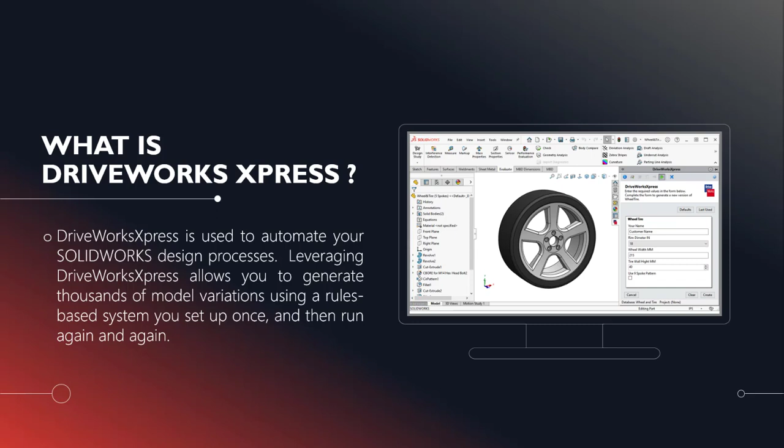And today we're going to be looking at DriveWorksXpress. DriveWorksXpress is basically a SOLIDWORKS add-in, or a tool rather, that allows you to automate your design processes. So in the case where you have like a base model where you often have to do slight changes to it, or one-off changes where maybe a dimension's changed or a new feature is added here and there, but it's not a big change from the base model, it is a great tool to automatically drive those changes rather than going off and doing it yourself or having a designer spend time doing those changes.

So some of the benefits of DriveWorksXpress are it helps you minimize errors by using rule-based inputs. Basically, they're just form inputs that capture geometry from a model and push out model variants. So it also helps you save time by creating the models in a fraction of the time it would take a designer to go in and do it by hand.

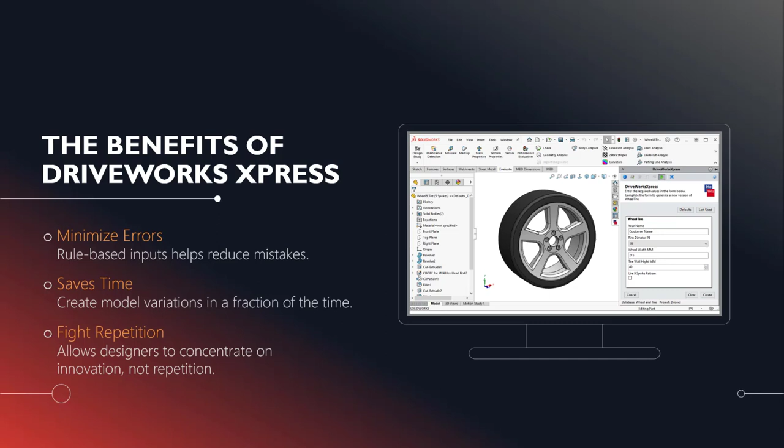And again, it saves the designer from being a little bored and having to do repetitive tasks that may not really require much thought and innovation. So it frees them up to innovate and come up with some new, more important stuff. It lowers your costs, again, by spending less time on one-off design, and it enhances your production.

And if you're familiar with configurations, you know that you can already do this type of stuff through them by just going in and picking a configuration for a base model that suits your need. But for some things, you might end up having thousands of configurations, hundreds of configurations, and it's a little tough to go in there and find what you're looking for, and it makes the model or assembly pretty heavy.

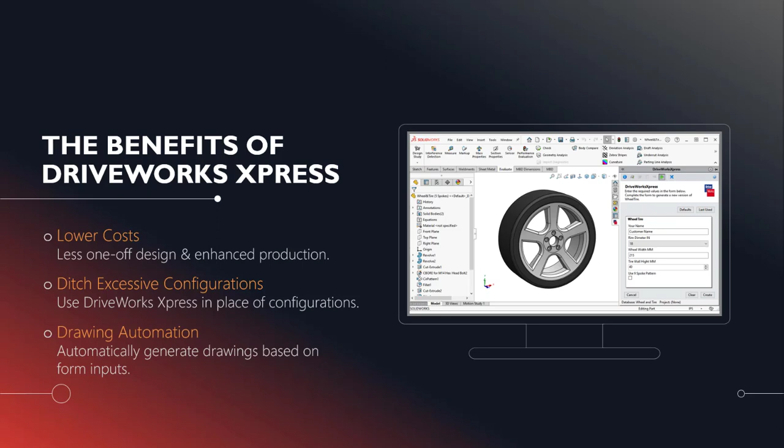And then again, you can also pump out a drawing along with these model variations. So without really any designer input for SOLIDWORKS, you can create a new model variation and an associated drawing. So it's a pretty powerful tool. In today's session, we're going to focus on a wheel and tire project. I chose this because there are tons of possible variations with the combination of rim sizes and wheel widths and tire heights. So having configurations to represent all the possible combinations of these would be a pretty big part. So this is a good tool for that.

It's simpler than using design tables. If you are familiar with automating your designs in SOLIDWORKS, you could do similar things with design tables, but the form inputs used in DriveWorksXpress are much more intuitive, and it allows someone who's not familiar with SOLIDWORKS at all, or even the design tables for Excel-based tables, to go in and just basically create the design they're looking for. Could be a shop tech or even the customer. And again, it'll create an associated drawing there with the variant.

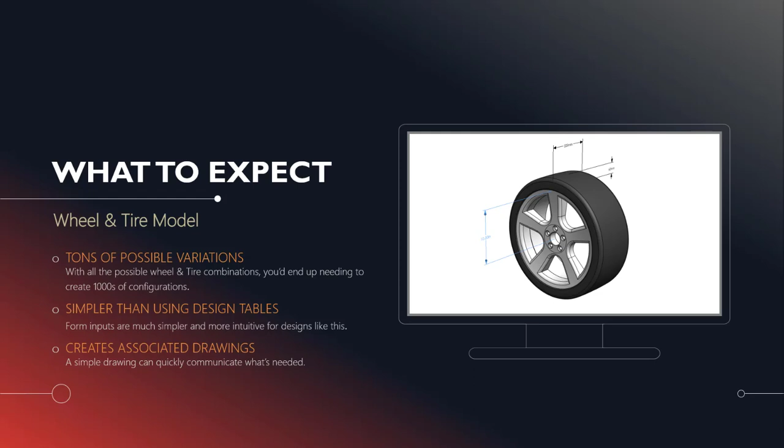The things we're going to go over today. First, we're going to capture the model and the model data. These are the dimensions and features in the model that are actually driven by the values that you input in the form. Next, we'll go ahead and create the input form. This is basically where you define the values that are input by the customer or the tech or what have it. And then we're going to define the rules.

The rules are used to basically link the input form with the model data and actually push the changes. So these are equation-based rules, basic logic. If you're not that familiar with logic, don't feel too bad there. It's pretty easy stuff, and the rule builder helps you out. It's not hard at all. And then we'll go ahead and produce a model variation and a drawing based on that variation.

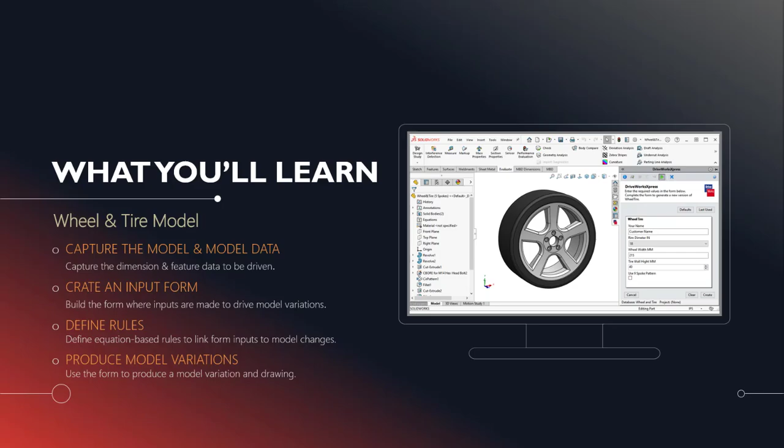So to start, if you have never used an Express tool in SOLIDWORKS, they require activation. Now, DriveWorksXpress does come free with every seat of SOLIDWORKS, but you still need to go to mysolidworks.com/express. And if you don't already have a profile for mysolidworks.com, you can set it up and enter your product key there. And once you get to that point, they'll give you an activation code. And then when you go to actually launch DriveWorksXpress, it'll just prompt you to enter that code. And you just have to do that once. So every time you go back in the future, you don't have to worry about entering that code each time. So let's go ahead and get started.

And I'm just going to go ahead and pull up SOLIDWORKS here. And you can see my wheel and tire model here. Pretty straightforward. You can use Xpress with assemblies or parts. There's no difference between the two. Parts are just a little bit more simple, so for the purpose of this demonstration, I just chose to go with the part. I also have it set up for capture annotation. These are the dimensions I'm going to capture here shortly, and they're actually going to drive the model changes.

So I'll double click on that to show you these. You might also notice that I'm dealing with inches here for the rim size and millimeters for the tire size. This is not only kind of a standard in the industry, but it'll allow me to build some more complicated rules when we get to that point, just to show you all the things that DriveWorksXpress can do. Besides that, it's a pretty straightforward model.

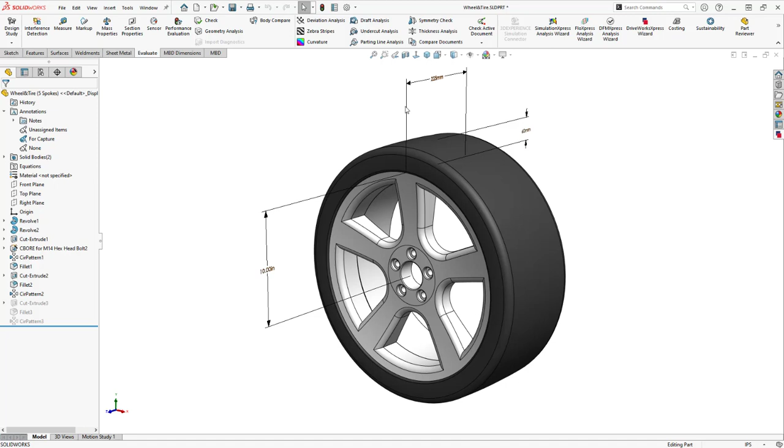So let's go ahead and get into DriveWorksXpress. DriveWorksXpress can be activated from the Evaluate toolbar here, or you can go into Tools, Express Products, DriveWorksXpress. It'll open in the task pane. We're going to go ahead and pin that here just to make sure it doesn't close on us. And you see the three options here: create a new database, add models to an existing database, or run models from an existing database.

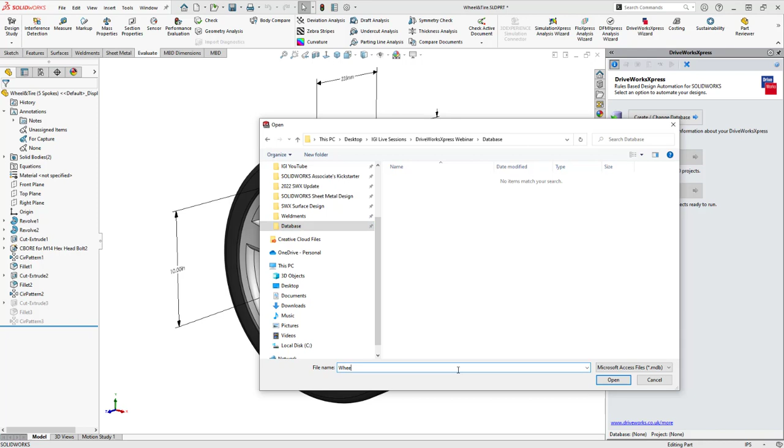Now, since we don't have a database created already, I only have this one option available to me. So with it toggled, I'll go ahead and hit Next. It's just going to prompt me for a place to save the database. I'm going to go in here in this database folder, and we'll call it Wheel and Tire. Now you can see it here populated in the active database.

Next, we need to add models. You can either browse for a new model or use the current model. We'll just hit Next to use the current model. And we can see the part listed here, Wheel and Tire. Now it's time to capture the actual data that will be driven by the form inputs. So we've already captured the model down here. You can see the buttons related to the captured data.

Next, we need to do dimensions and features. So I'll click that button, and you just simply click on a dimension or feature in the graphics area to add it to the list over here. And I've already named my dimensions relevantly. So we've already got width down here, but you could change that if you need to, and go ahead and hit the Add button to add it to the dimensions folder.

You can also capture features, but for the purposes of this lesson, I'm going to use configurations to drive the feature changes. So as you see here, I have a 5-spoke pattern and a 9-spoke pattern. You can see this 9-spoke pattern. We'll go back to the 5-spoke for default. If I wanted to, I could go in and create rules to turn those features on or off based on what we want to use. But just using configurations in this case is a little bit more straightforward and keeps things simple. So that's the route we're going to take.

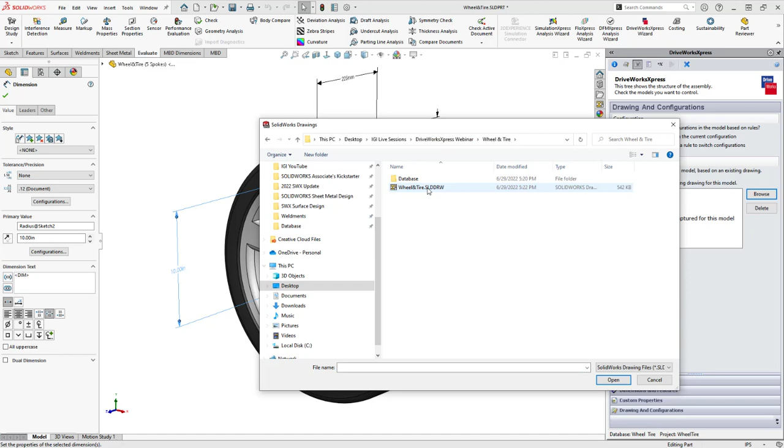And lastly, I do want to use configurations to drive that spoke pattern there. So I'm going to toggle yes, allow me to create rules to switch configurations. And I also want to create a drawing based on the variation as well. So just like you have to have a base part to generate variations of the part or model, you need to have a base drawing to do the same thing. So I'll browse to my wheel and tire drawing right here. Just double click at the top. So that's everything we need to capture.

Next step is onto the form creation itself. Each form input requires a name, and we're going to start off with just customer input here. In the form I'm going to want the customer to enter their name. So we'll just call this customer name. And it's just going to be a simple text box. So I'll go ahead and hit next again.

And here's our little form preview area. You can see that form input right there. I can go ahead and edit that if I need to. If I want to delete it, select it and delete it, or I can even test it to see if it works the way I want. You can see here that I've got a little exclamation saying that this isn't a valid entry, but as soon as I enter something, we're fine here. So as you do form inputs, you can go through and test each one just to make sure that you've defined them correctly.

So I'm going to go ahead and add our next form input. For this one, I'm going to want to do the rim diameter. So we'll call this rim diameter.

We're going to do this in inches. Remember, I had that in inches instead of millimeters. And just as a side note, my model units are also in inches here. So when we get to those millimeter inputs, we're going to have to do a little bit of conversion there to get everything to inches.

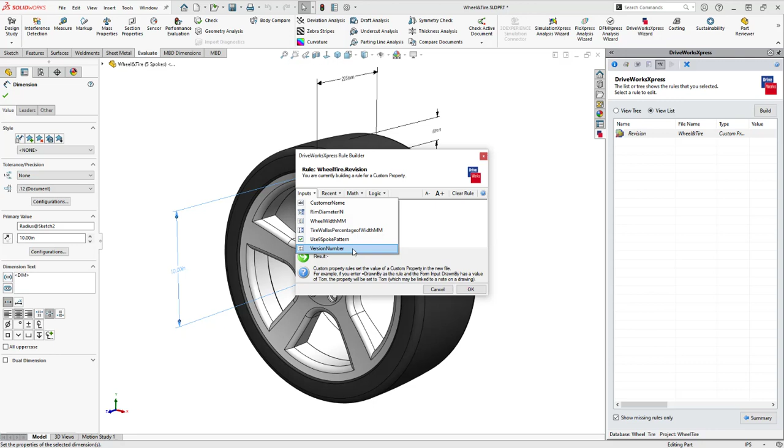Next thing we want to do is the rim diameter. So we'll pick the rim diameter input here, and if you notice, our dimension here is actually a radius dimension. So I'm just going to go ahead and divide this by 2 to get the correct dimension. And we'll say OK. Now we have a drawn by. This is real simple. This is just for the drawing output. And I'm just going to use the customer name here for the drawn by. And lastly, revision number. And we'll just pick the version number input there. And click OK.

So there we go. All our rules have been built and showed to be valid. So we double check everything looks good there. There are no X's. So I'm going to go ahead and go next on to create the actual model variant. So I'll start by entering my name. And maybe we'll do some type of truck tire here. So typically they have a smaller rim and a higher wheel height. Maybe usually a wider wheel too.

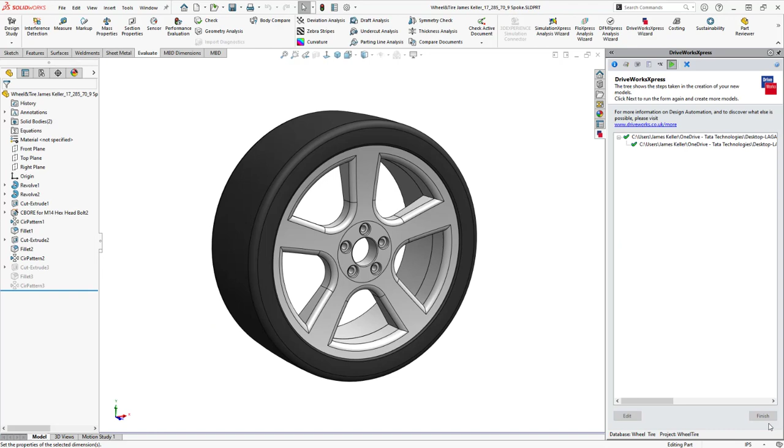We'll go 285 for this wheel. And for the height, let's just go 70% of that width. And I think I'm going to use this fancy 9-spoke pattern. And we'll just keep the revision number, version number there at 1. And all I have to do is click Create down here at the bottom, and SOLIDWORKS should just run through it. And you can see there that it creates my big fat truck tire and an associated drawing. And you can see here on the side, everything was checked off. So if you have some rules that are built improperly, or maybe some error happened somewhere along the lines, these are here to help you root out that error and figure out exactly what the problem is.

If we go in and actually look at my files here, this is exactly where the base part was located. Went ahead and just saved the new part to that. We've got wheel and tire, James Keller, and all the stuff I entered, just like I wanted. And we also have the associated drawing here. So I'll go ahead and open that so we can see it. And it's pretty simple. Got some dimensions here to call out stuff. And maybe the tech in the shop wants to assemble this wheel and tire combo, and this is just a real easy reference for him to know exactly what he wants to get off the shelves there and make it happen. You can assign part numbers and stuff as needed. This is a pretty simple example, but it just gives you an idea of what can be driven here. Go ahead and close that.

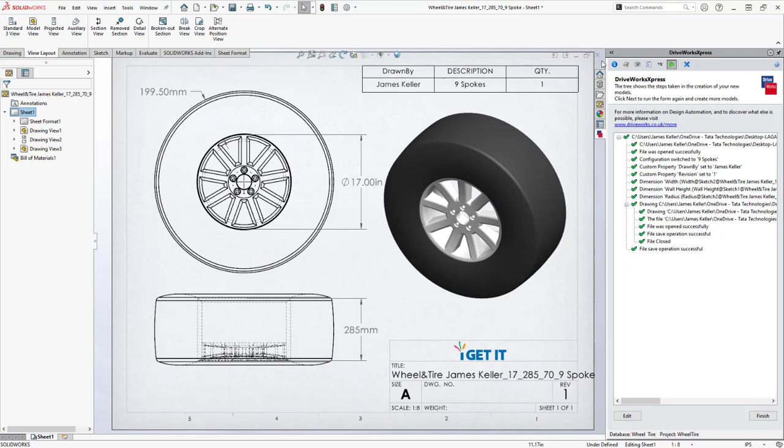And I think that about does it for DriveWorksXpress. This is a pretty simple example, but you can get an idea of how powerful the tool is.